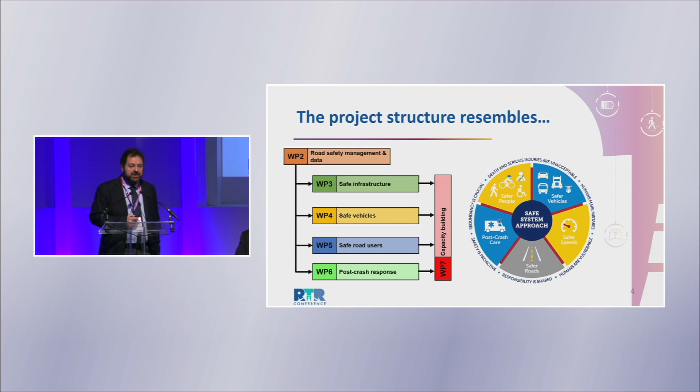But to go more into details, and the time is short, I'll try to give you a brief introduction of what we are doing in Africa and what the main results are so far.

Talking about road safety management and data, our main idea, which you will see in almost all work packages and activities, is this: first of all, we know quite little about Africa and how the system works. All our countries, just by coincidence, are sub-Saharan, and we realized there is a pattern. The way road safety is implemented and treated in those countries is quite similar, with some exceptions of course.

The way we approach the first activities is to try to understand and map the activities. What are the activities? How are the participating countries dealing with safety? Most of them have offices, they have a structure, but of course there are some gaps between them, and some gaps in the possibilities.

With road safety management, our idea is to try to understand how it's implemented, review the national road safety programs, and now we are also in the process of mapping what data is missing, what is needed for continuing and implementing road safety management at the whole level.

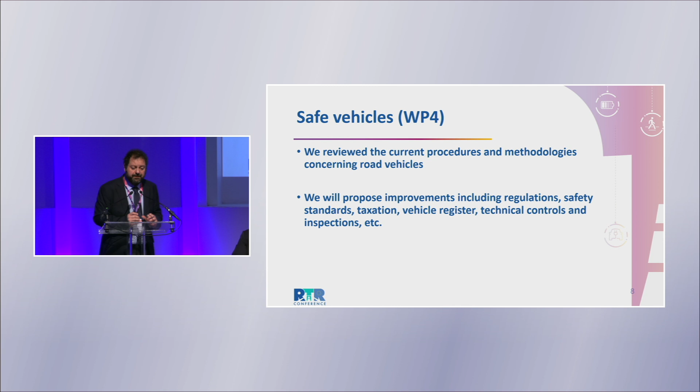And safe road users - we are looking mainly at vulnerable road users. We already reviewed current practice concerning road users from a safe system perspective. We have mapped road safety culture in most African countries and benchmarked it against Europe, the Nordic countries participating, and they carried out pilots to introduce the safe system mindset.

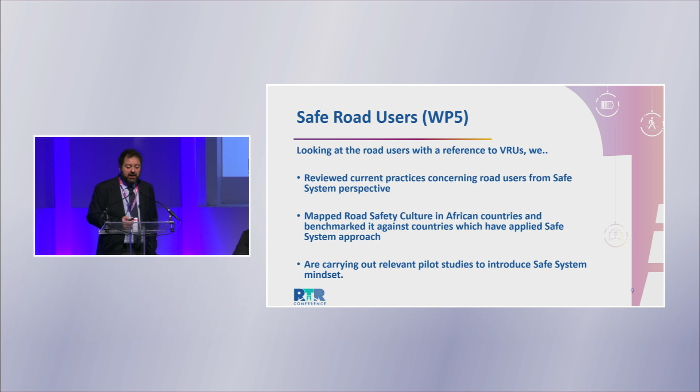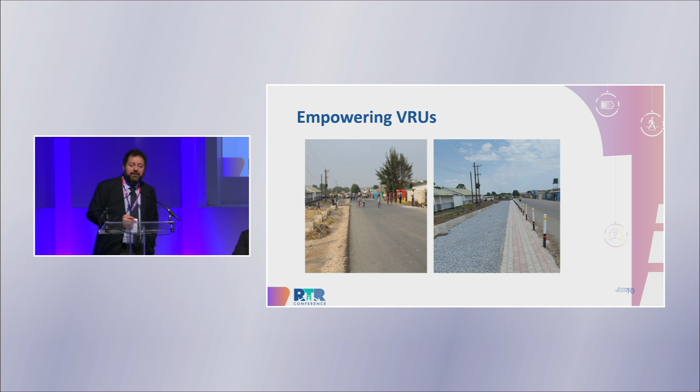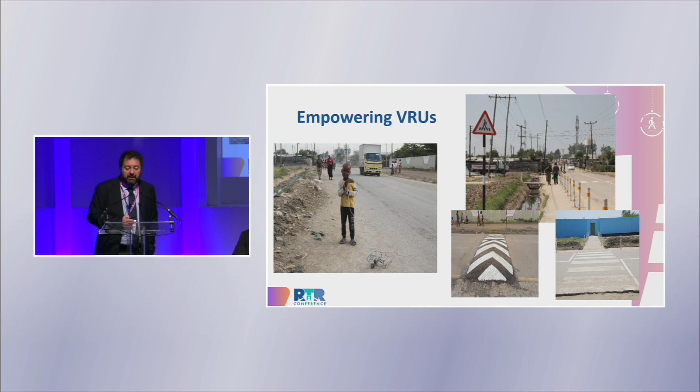One interesting thing is a pilot - we had the opportunity, this was not funded by our project, it was already there, we just did the analysis. They basically changed the entire path to school. This was in Lusaka, in Zambia, and we could really see the difference when people can have a safe space with reduced speed, and here were students - I think this was an elementary school.

We are also dealing with things we didn't expect before, like fatalism in traffic safety. We realized that in some countries - and this is a learning process for us that is still ongoing - several people in Africa really think that road accidents are sometimes connected to something else, that you cannot avoid them, or if you avoid them it's because you have a talisman or because something is connected to you. When you think about this, you say okay, but this is incredible, it's so far from us.

You think maybe different people have different feelings, but I can assure you that most of the people there, including colleagues, university professors, have this belief. Maybe not 100%, but it's still there. So we need to really put ourselves in their culture, in their shoes, and try to figure out if there is any possible way to work with this.

We are working on this. We have an extra study, and we published a paper recently. Post-crash response is extremely important. We take the WHO as a reference. They have a system with protocols for post-crash care, and we are trying to figure out if this is something we can implement there and how. It's very important - we really invested a lot in Sweden and the entire Europe for post-crash care, and we hope it would be very immediate for them to do it.

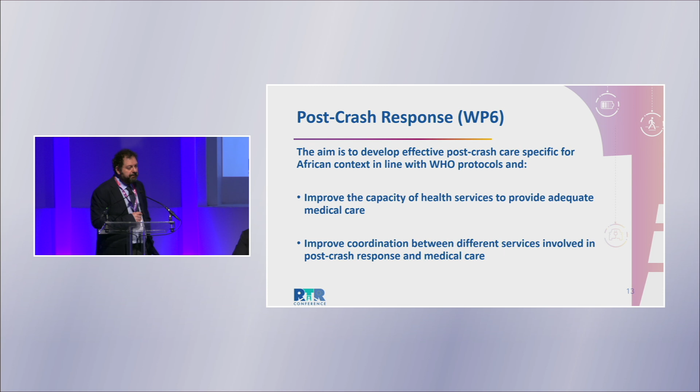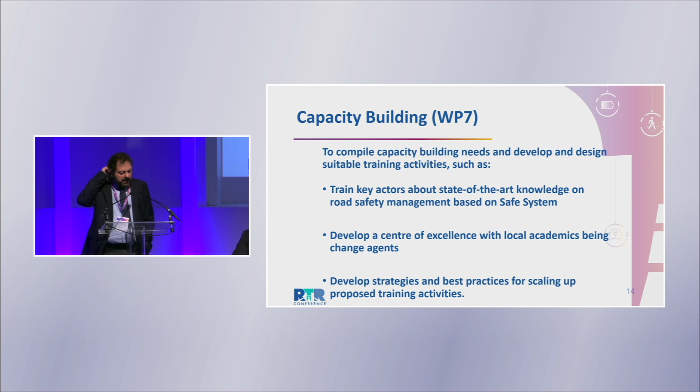We are running a pilot in Zambia for that. And capacity building is extremely important for us, because we realized - and this is again a lesson learned - that in Africa, most of the knowledge is already there. Our colleagues at the university have a PhD from South Africa, North America, or Europe, or have traveled and are very knowledgeable, but when they come back to Africa and get a position, their knowledge stops at when they finished their PhD. They rarely have access to resources, so it's quite difficult for them to deal with this.

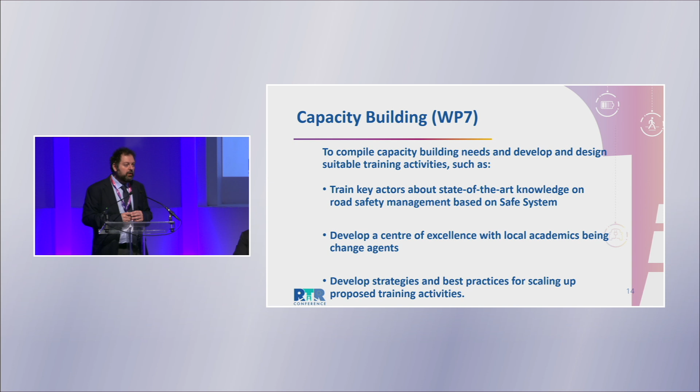So our plan is to create an academy, and we're very proud of it. You can find it online, so please Google it if you want - I can give you the reference later. It's called AfroSAFE Academy.

In which we try to empower researchers. How? By providing fresh knowledge as much as we can, but at the same time trying to create a platform in which they can exchange ideas, get exposed to what we do in Europe, but also what has been done in other low and medium income countries, and try to be an opportunity for research funding for developing further traffic safety in Africa, and education. So we are creating a program for a traffic safety course at the university level that we hope the participating universities can implement in their own universities.

And in the same way, this is one of the main contacts we have with our sister project that Oliver is coordinating, and maybe he will tell you a bit more about what is happening in TRANS-SAFE. But yeah, we think this is the right direction. This is quite consolidated already - I will tell you a bit more about this.

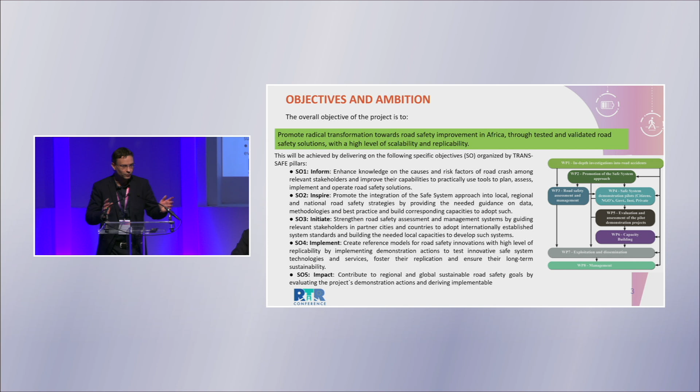And we did that in a similar way also geographically, so we bring together a 50-50 split, let's say, of partners from Europe and Africa, and from the sustainability and safety realm. We focus our project on the usual five steps that we take in our Urban Living Lab projects, where we start to inform about solutions that are out there that can be easily implemented and replicated, inspire with best practices from all over the world to create a bit less anxiety on picking up new solutions in a city, and then facilitate partnerships on the ground so that we bring together key actors and stakeholders and initiate those partnerships.

And then we start implementing at least some parts of the spectrum of solutions that we've identified, to also show what it looked like and to test and validate the solutions on the ground. These are also quite vital later on to get a bit more visibility at the political spectrum, but also with funders and other project implementers to pick up and scale up solutions, because this is our key focus. We don't stay at the small level, we always go for the big impact, at the city level, at the national level, but then also bringing it to the international sphere.

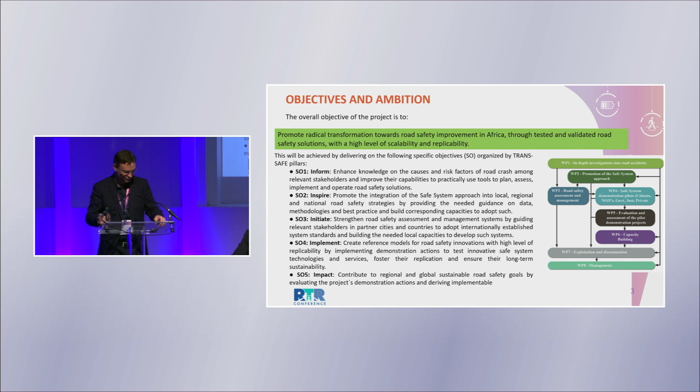So this is also our focus for next week, where the Global Road Safety Ministerial Meeting will be happening in Marrakesh, and our partners from NARSA, from the National Road Safety Agency, Morocco, will be the co-facilitators of that workshop, and we will be having a joint session with the two sister projects there to present our results so far.

And we focused in a similar way as our sister project did on assessing the current state of the art, collecting the data so that we can have an evidence base of our research and the interventions that we'll be choosing.

And we quite deliberately chose a diverse mix of partner countries for the demonstrations that we have. Africa is very diverse, and covering all that diversity is quite challenging. So we are diving in deeper in Ghana, Rwanda, South Africa, and Zambia, because there are different elements of the puzzle that we would like to solve.

For example, a key mode of transportation in places like Ghana and Rwanda is two-wheelers as taxis, which is a critical element to provide jobs and mobility services, but of course it comes with challenges with regard to safety. Here is a great opportunity to electrify those, so this is where our angle is here.

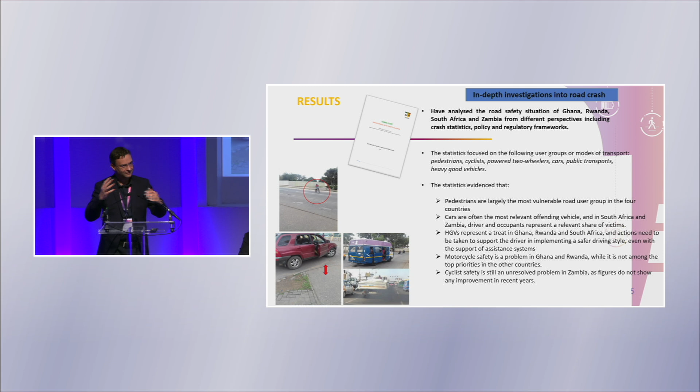Pedestrians are the vast majority of mobility users in many of our partner countries. Not necessarily always by choice, because this is the mode that they can afford, and this is also the mode that brings them to work, even if it means walking there for an hour and not enjoying a very nice and walkable city center.

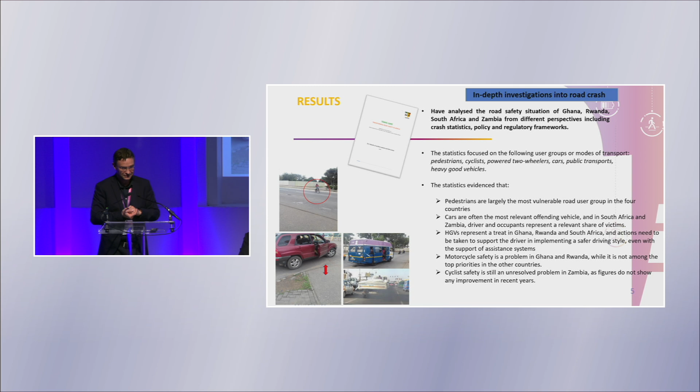So we need to also look into the conundrum of the social and empowerment aspects of this. Making a city walkable is also a critical element with regard to social and economic participation. And cycling is not as much of a big player in many of our partner cities, and one of the key inhibiting factors is, of course, also safety.

So again, just to show a tiny bit the interplay between the safety and sustainability realms, we bring all of that into lots of knowledge products.

There is already plenty of work in the field of road safety, and we try to make that accessible. We've quite deliberately chosen a number of partner universities in the region to be our key partners in the project, also to ensure the sustainability of the activities and take on those knowledge products in the teaching and learning, bringing this into the curriculum.

And we've taken a little bit of a different touch on the Safe System, and I'll let Marianne from the University of Cape Town explain that, because that's her doing in giving us a slightly different look into the Safe System approach, giving it more of a focus onto the individual and the user.

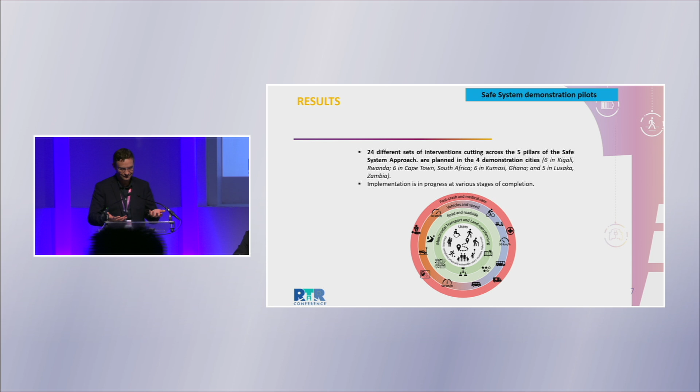And this is also what we try to translate back into the sustainability realm. We have years of experience now with the Safe System in road safety, and similarly, from the sustainability perspective, that's a twist we also need to take. It's not the user's fault if they move around unsustainably, it's the system's fault. We need to provide services that are safe and sustainable for people to move around safely and sustainably.

And just a quick touch on some of the solutions that we test and validate in our partner cities and countries. We have around 24 solutions that we test and validate in different environments. All of these are reasonably simple and frugal, so that they are reasonably easy to replicate everywhere across the continent.

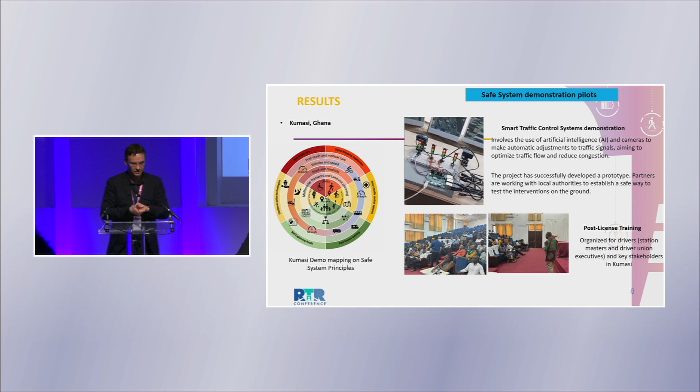For example, in Kumasi, the second biggest city in Ghana, we're testing smart traffic control systems, but these ones are reasonably simple and affordable as well for every similar city to pick up. There are also post-licensing trainings being carried out by the colleagues.

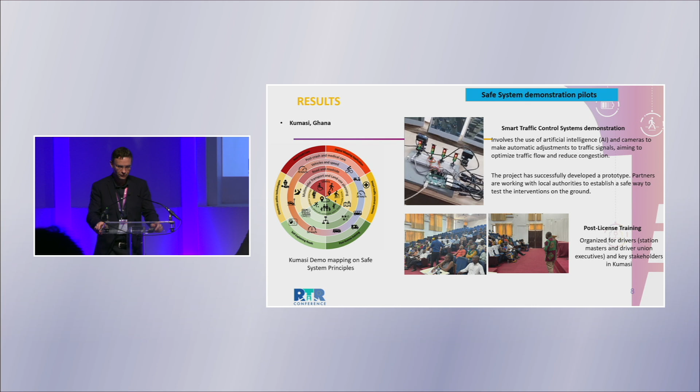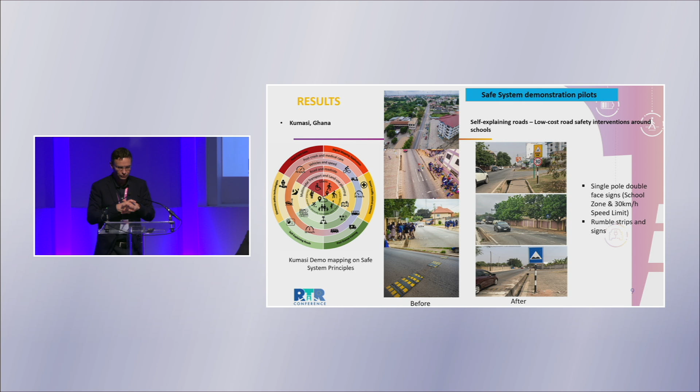We also focus on street design and road safety interventions with regard to self-explaining roads, making sure that we use the infrastructure we have and upgrade it just a little bit. Again, affordability is a key factor here.

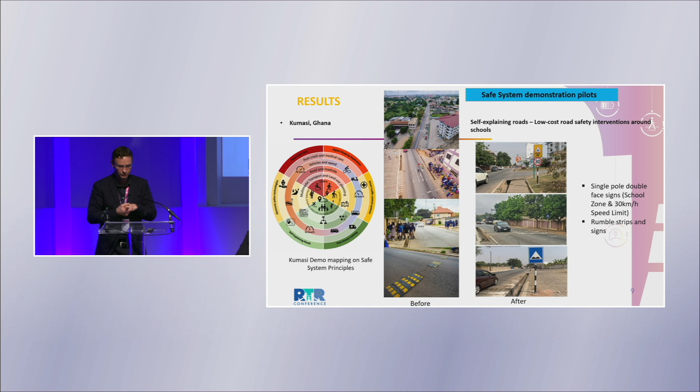Traffic calming in a way that really combines traffic flow and safety at the same time. And a key element for that is also to involve local students and local schools, so that we can really embed some of that co-design in the local community, so that this is not perceived as something coming from the outside.

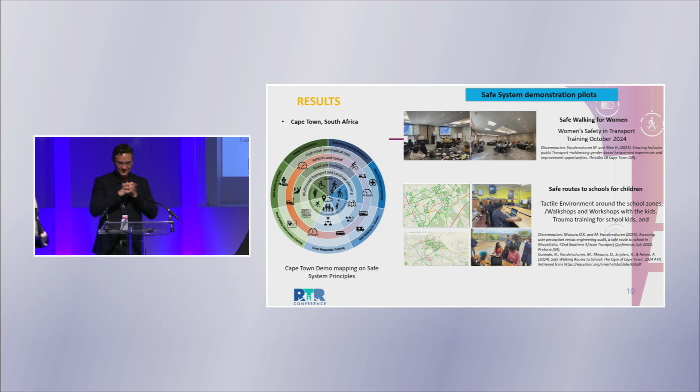Thank you very much, Oliver, and good morning everybody. Or is it afternoon already? I think it's just about to turn afternoon.

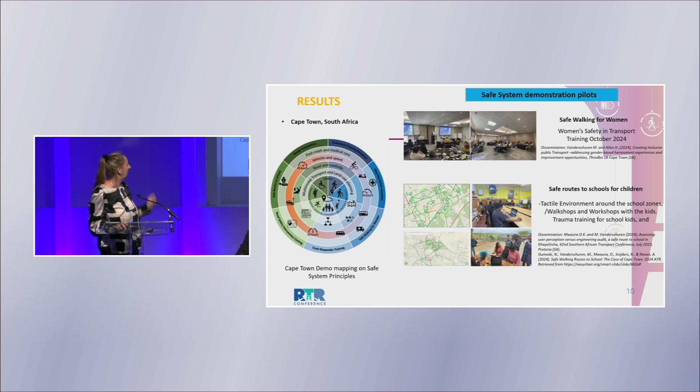From the Cape Town side, if I can come back to the wheel - we've called it a wheel of road safety, the safe systems approach - we were thinking the user needs to be at the core. So we've rethought and redesigned what's in the safe systems approach already, putting the user at the core.

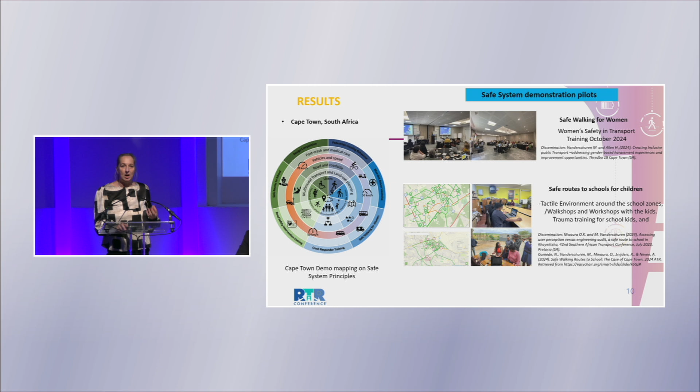In every single city, at the outer ring, the sixth ring, you'll see the different projects we're doing. For Cape Town, we're developing an algorithm to identify pedestrians on freeways. For Europeans and Americans here, why would pedestrians be on freeways? Well, in Africa there are, because there's no secondary road network, and they will cross the freeways as well. There are lots and lots of crashes with pedestrians.

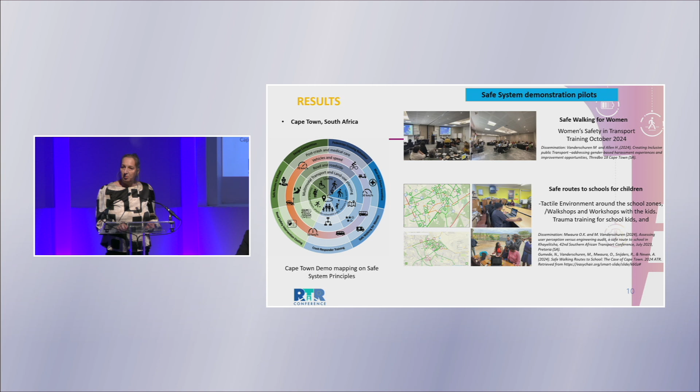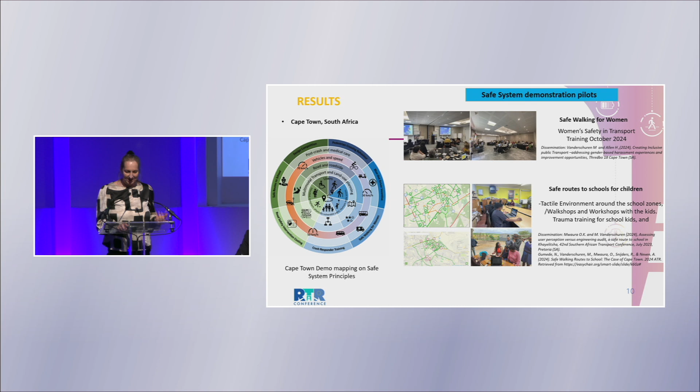So being able to identify them and act upon it is one of the things we're doing. Interventions with minibus taxis is something else. We have women's security, because besides road safety there are personal security issues, and they go hand in hand. We have safe routes to school that we're testing. We're calculating the potential financially through a cost-benefit analysis of road fatalities - the advantage in the South African context is that people have put a value on life, which means we can do this analysis. We also did a design competition last year, and we have post-crash care training.

Looking at the slides to give an idea of where we are: all the demos have been finalized, and now we're seeing how to take them forward. For example, the latest on safe walking for women is that we had a big conference in October where we shared our findings, also from sister cities and sister organizations and other projects in Cape Town, with a big workshop of more than 40 participants.

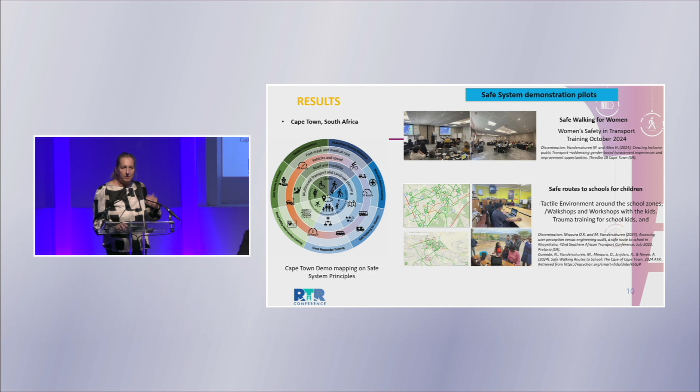We're disseminating as much as we can of our findings, including at the local Southern African Transport Conference, to make sure we keep updating local stakeholders as well.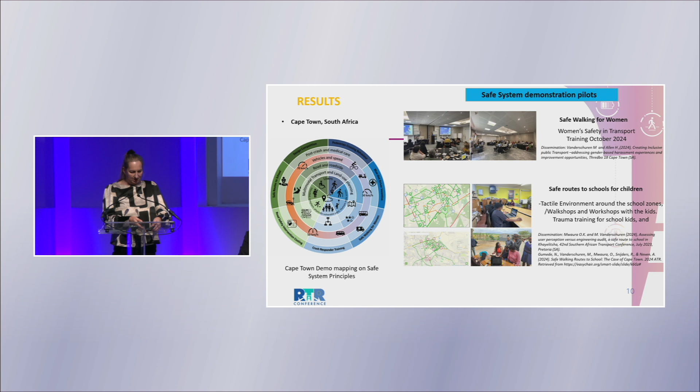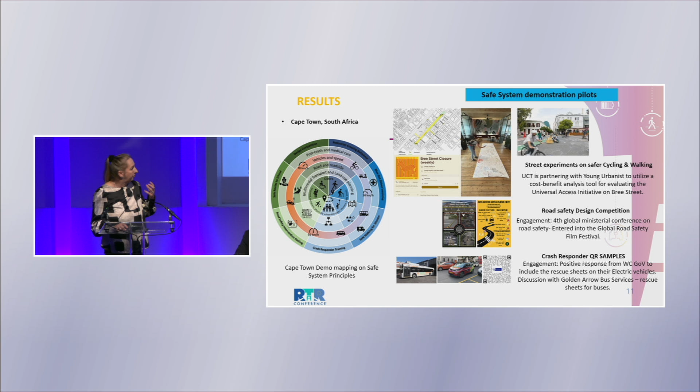For safe routes to school, we've done 3 schools and we're going back to do training there. We're also doing walking aspects and collaborating with young urbanists who are changing a corridor - they're training children, and we're doing before and after studies to identify the impacts.

We have the road safety design competition - we're now trying to see what we can take out of that, but there were 35,000 students invited to participate in that all over South Africa.

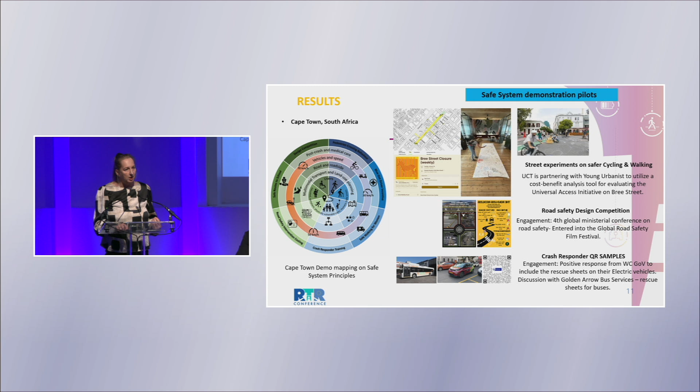For post-crash care, we're at the beginning of this - coming back to sustainability, we're using the introduction of electric vehicles to have rescue sheets rolled out in the South African context. By combining these two new approaches, we're able to get stakeholders involved.

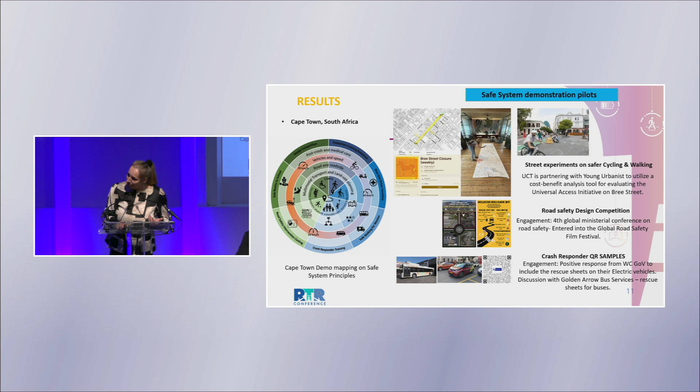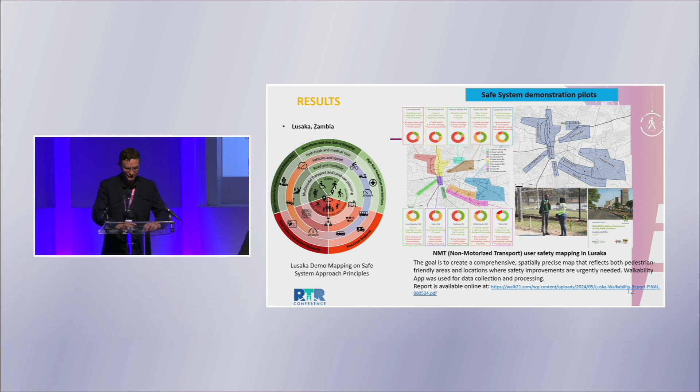Moving on to Lusaka, Zambia, where we also did a similar exercise involving young people in the walkability assessment, working with local schools, and also a sister project from the UN Road Safety Fund to improve walking conditions around schools.

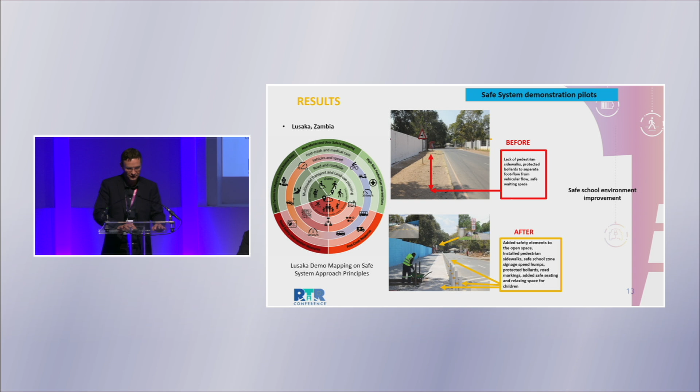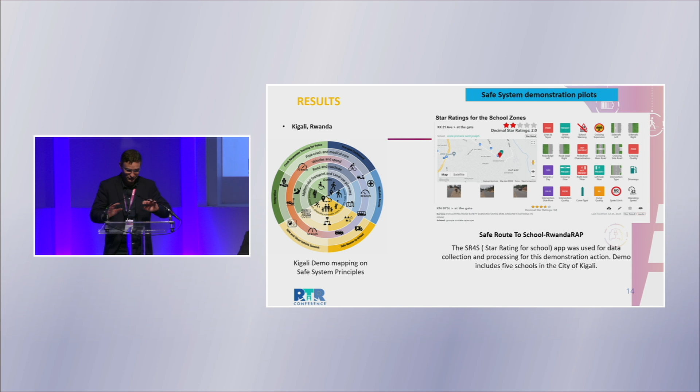Moving on to Kigali, Rwanda, where we also closely integrate the sustainability and safety realms - we did a star rating around schools, developed a road crash dashboard that was very much appreciated also by the local police, an important local stakeholder and partner in all our activities. So we always have an eye on the bigger picture here.

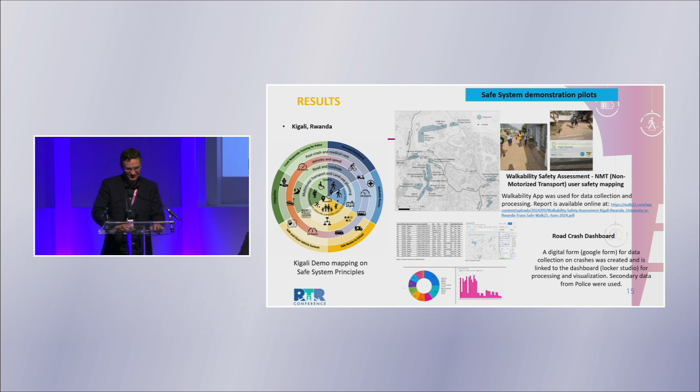We bring all of that into audits, into evaluations, into our sustainability activities beyond the project's lifetime. That feeds into recommendations towards policy, towards new and upcoming projects, not just in the road safety realm.

Now it's usually, or quite often, road safety takes a backseat in the programming of some of the key funders, so we would also bring road safety into other climate and sustainability projects. And the evaluations that we take here are quite critical.

And the other one, which also goes to what Camilo presented on the academy side of things, we could continue further in our Urban Living Lab Center and the partner university activities on empowering teachers and lecturers to take the teaching material forward. We are now, as Marianne said, in the process of validating the demonstrations we've had, and then bringing them into other programs and projects, and into policy advice for local and national authorities.

A key factor now is also focusing on skills and skill development. We have an eye on the future change makers when we involve young students in the co-design processes, because they will move into policy and planning roles in their cities and countries. So we empower them and bring all of those learnings into the curricula.

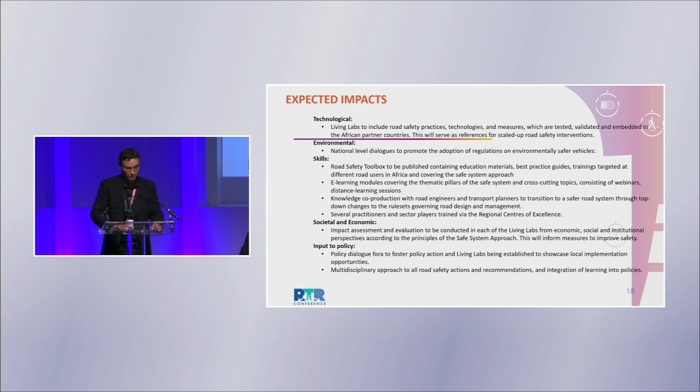And with that, my time is up, I'll just leave it at that. Maybe just to say, for the coordination side, we also take quite a team approach. There are two other colleagues, Edmund, who is originally from Ghana, and Butamilo, who is originally from South Africa. So we are also quite a diverse team in running this Trans-Safe project. Thank you very much.

Thank you very much, Oliver. A very complementary presentation with different approaches, but also with the aim of having a safe system approach of the whole transport system. Without further ado, I will give the floor now to George, who will moderate the Q&A session.

Thank you. I think it was amazing, 15 minutes sharp both. We are just in time, so we are ready for a very vivid discussion.

I think that the support of road safety in low and middle income countries is one of the 8 pillars of the European Union road safety strategy. And this EU interest is fully demonstrated through these two projects, which, as Patrick already said, are fully complementary, so there is great added value. Of course, the European Commission and European Union support is continued with the African Road Safety Observatory. This is my first question: how do you see the next steps of your projects feeding the African Road Safety Observatory on one hand, and how do you see your outputs being used for long? The deliverables are there, but how do you see them being further exploited?